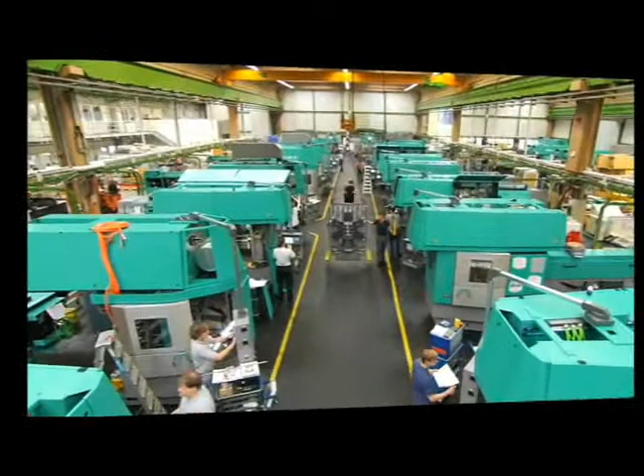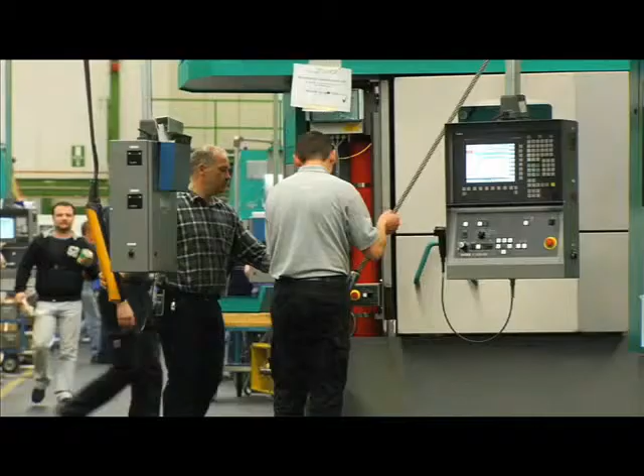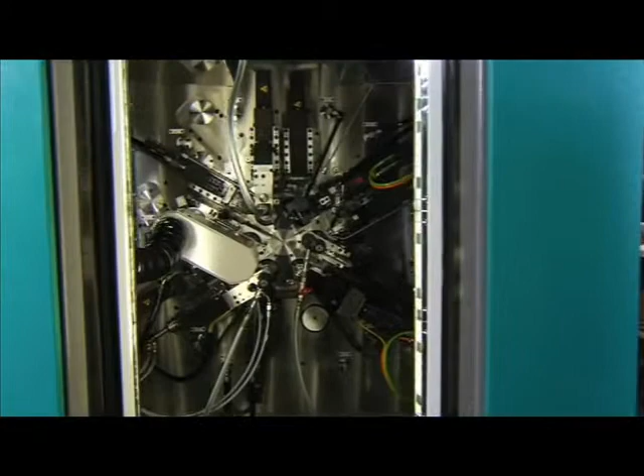The Index production facilities are one of the leading manufacturers of CNC lathes worldwide and headquartered in Esslingen. The Index Group is a major player in the international market because of its production sites and sales offices in Europe and Asia, as well as in North and South America. The specialty of this worldwide acting, long-established company, which was founded in 1914 and currently employs more than 2,300 people, are multifunctional production centers. Technical innovation is part of the Esslingen company tradition because Index works in a market segment of very complex products and has a pole position on the market because of its innovations.

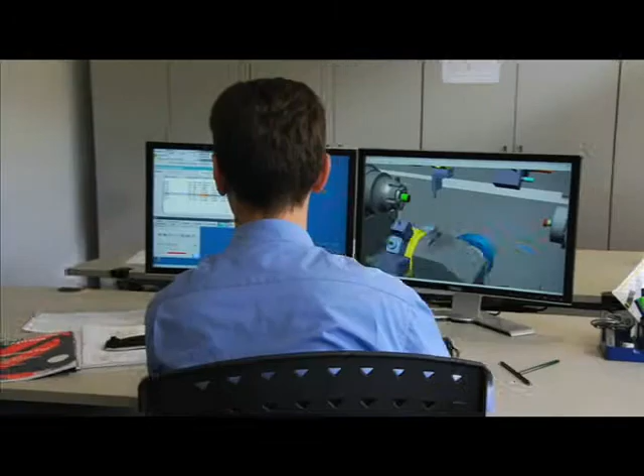The Index Control Engineering Director, Mr. Eberhard Beck, totally trusts in his strong partner, Siemens, when it comes to this task. Siemens is leading in technique and technology for controls, just as we are leading in technology for machine tools. We need a strong partner who is able to implement our ideas concerning mechanical engineering in control applications.

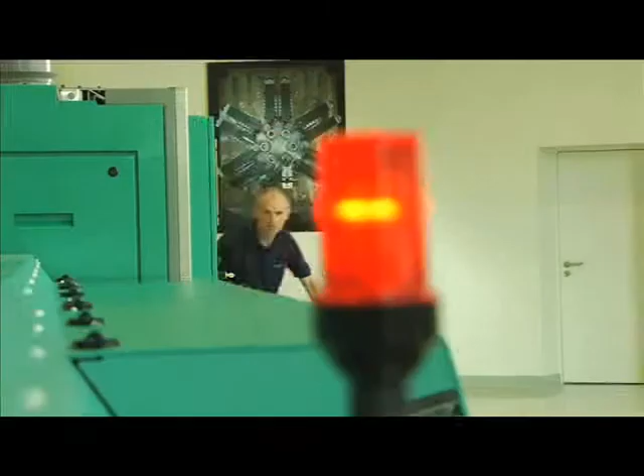The virtual machine software is an example of partner-like cooperation. For complex machining operations, it can take a whole day or one and a half days to program and set up a machine tool for a new workpiece in order to start a test run. During this period, the machine tool is blocked, which has a negative effect on the overall operating efficiency of the machine.

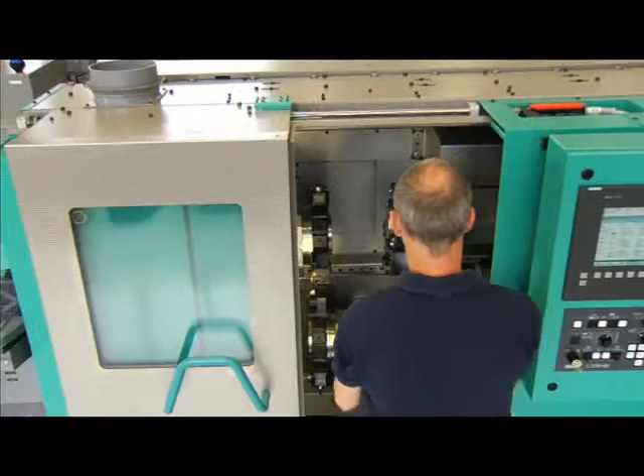The main idea regarding the virtual machine was to install a one-to-one copy of the machine tool on a personal computer and make it available as a tool to the machine operator.

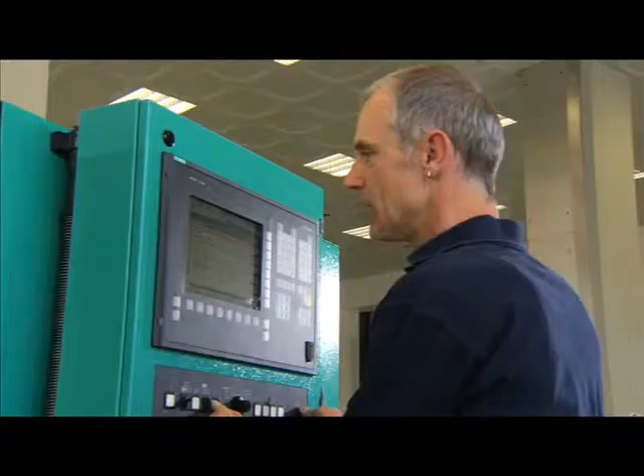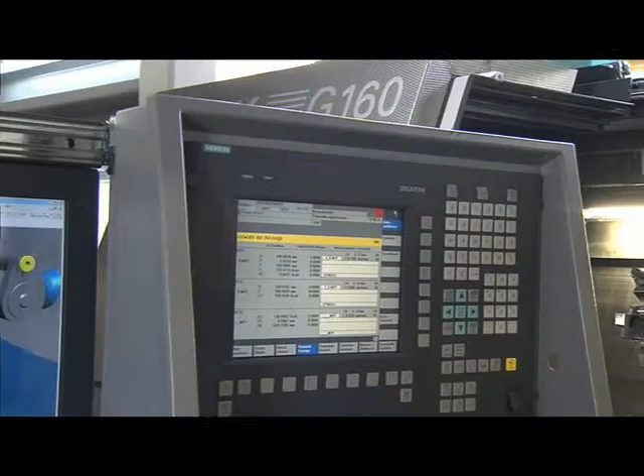The main particularity is the fact that the complex functions of the control are imaged at 100%. Compared to former systems where it was tried to copy the control, we now have 100% coverage of the functions. That means the customer can be sure that the simulation acts like his real machine tool. The machine operator has exactly his two views, namely the display view of the control and the view onto the working area, which he knows, and he operates the simulation in exactly the same way as his machine tool. That means no rethinking and no training would be necessary.

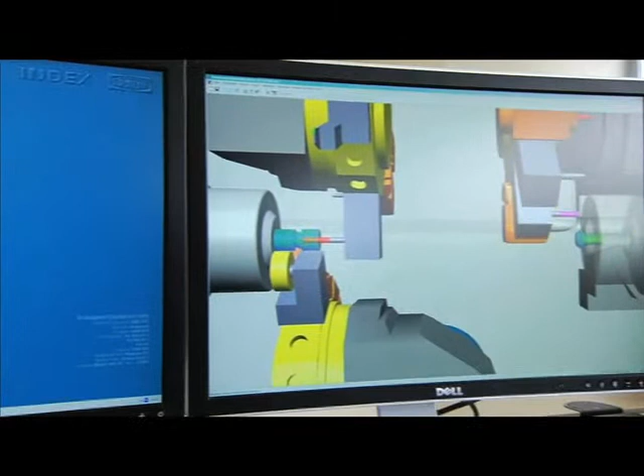The end user can save a lot of time on the real machine tool, especially with regard to setup times. In the past, we've spent a lot of time troubleshooting on the machine. Today, we can spend this time at the office simultaneously with the production process, which of course allows longer machine tool run times and reduces downtimes.

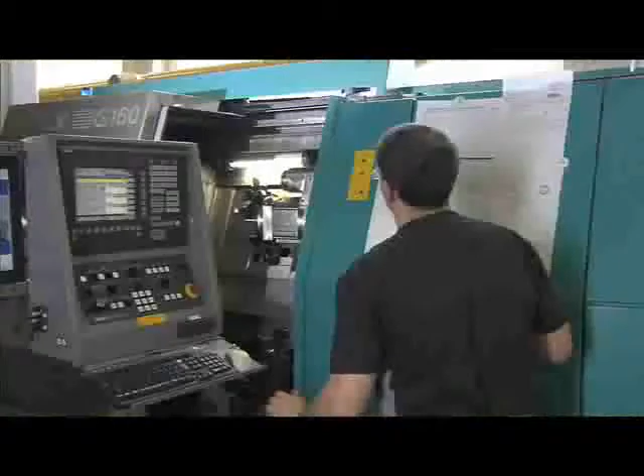However, the virtual machine offers some further advantages. Not only the hard facts are important—for example, the setup time upon the order change to new products is reduced by 80 to 90%—but the soft facts must also be considered. The machine operator can now approach an Index machine tool in a safer way.

He can learn how to handle it by using the virtual machine. He can test it and run his new programs without requiring a real machine tool. It goes without saying that in this case, he doesn't run the risk of causing a collision, which might possibly cause major damage.

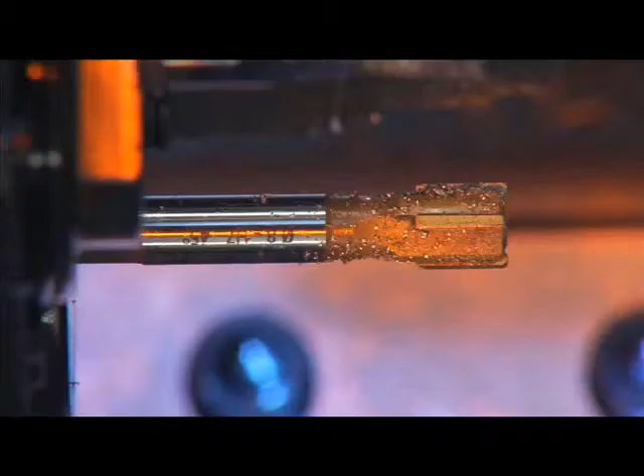The virtual machine has been designed by three strong partners who have contributed their core competence: Siemens with control engineering, Siemens PLM with 3D simulation, and Index with machine operation and tool geometry as its core competences.

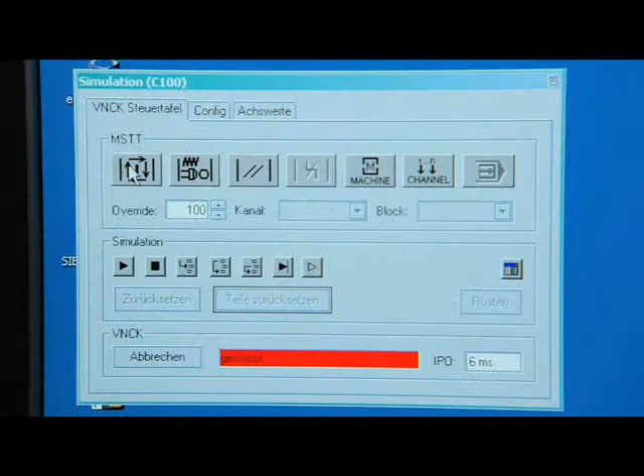Index and Siemens managed to create an absolutely new simulation product which hasn't been available on the market in this form. In this respect, we see not only market leadership in the field of turning-milling centers, but also market leadership regarding simulation applications.

The virtual machine was just the beginning. In cooperation with Siemens and Siemens PLM, we will continue to optimize the process chain from engineering through to production, so that we will be able to produce even more economically in the future.